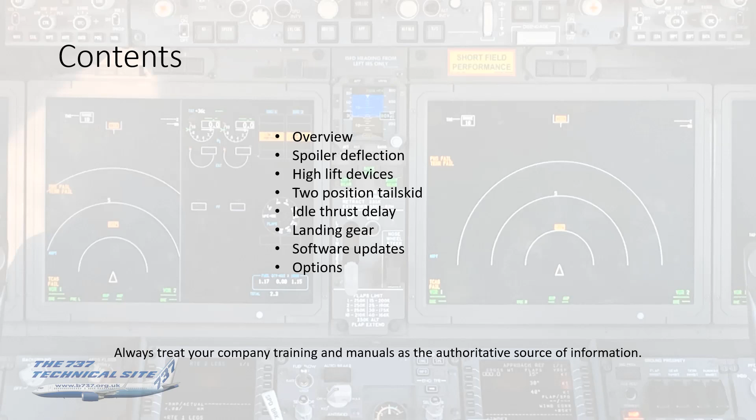Okay, starting with the overview. The SFP improvement package, as Boeing refer to it, was developed in 2005/6 to allow GOL Airlines of Brazil to operate their 737-800s into the quite short Santos Dumont Airport. The runway there is 1,465 meters or 4,800 feet, which is quite tight in an 800, and they were finding that they were payload limited.

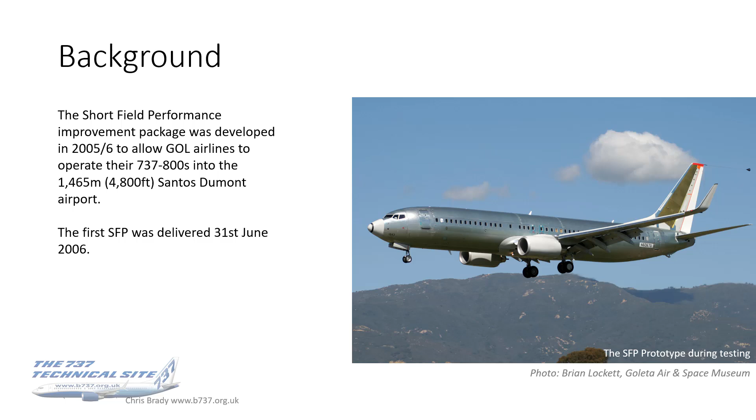So they approached Boeing, and Boeing got to work. The first SFP was delivered to GOL at the end of June 2006, and the photograph there, taken by a friend of mine, Brian Lockett, managed to catch this one, the prototype in development. You can see the two-position tailskid there is deployed for landing. It's also got a static cone up at the top of the fin there for static air pressure measurements, which are outside of the influence of the aircraft, and also similar measuring on that second window back from door one left. So various extra sensors and things that are used on the aircraft during prototype testing.

So what does the SFP give us? It either gives a weight increase for takeoff and landing from short runways, or allows an aircraft of the same weight to use a shorter runway. It amounts to the same thing - it's which do you want to optimize.

Some approximate figures here from Boeing's own literature. The takeoff field length limited takeoff weight is increased by 1,500 pounds. Climb gradient limited takeoff weight by an impressive 4,000 pounds. The takeoff roll is also reduced by 70 meters. And for landing, the VREF is reduced by 7 to 8 knots, depending, at flap 30, and around about 4 knots at flap 40. So there's quite a big advantage at the flap 30 stage there.

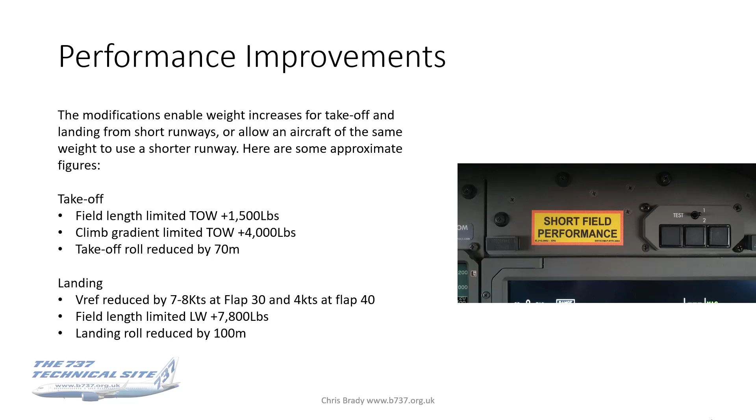Which is unfortunate, because obviously for short fields you would tend to use flap 40, but there we go. The field length limited landing weight increased by a very impressive 7,800 pounds, and the landing roll reduced by 100 meters. So there's a whole lot of performance improvements in there.

To sharp pencil this, what I've done here is shown you an extract from the flight planning performance manual. The page I'm displaying here is for the SFP1, so it doesn't have the two-position tailskid, but it's got all of the other features. I've compared that to the same 737-800 winglets without SFP, which I haven't shown on this page because it would be too busy, but you can see from the area I've circled and the enlargement of that, you're getting around about a 2-ton weight benefit for these circumstances here.

Just to outline what these circumstances were: it was the 7B26 engine, standard category C/N brakes, and this is the takeoff field limit dry runway, flap 25, packs on, anti-ice off. They're both using a field length of 2,750 meters available, 1% upslope, 20 knots headwind component, OAT of 32, and a pressure altitude of 4,000 feet.

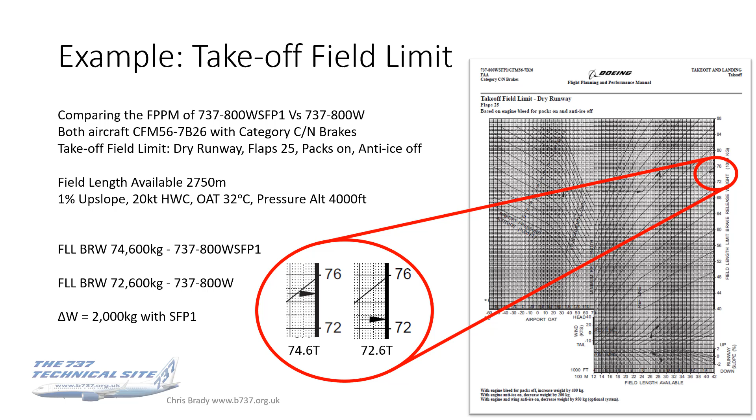And again, if you crunch the numbers, and you can see the reference line going up and across, and sliding here, there, and everywhere, you pop out with 74.6 with the SFP as opposed to 72.6 with the basic 800. So 2 tons is really quite significant - that's what, 20 passengers in round numbers. So it does make a difference to the flight being arguably profitable or not.

If it's not SFP, you can see the ground spoilers are unchanged at 60-degree deflection. But when the flight spoilers deploy on the ground, they've been used as ground spoilers as well, you get an increased deflection on the inboard pair of 65 degrees from 38, and the outboard pair of 56 degrees from 33. And that does two things: obviously, you've got an increase in form drag, which slows the aircraft down faster.

But secondly, and probably more significantly, it actually helps dump that lift and increases the loading on the main landing gear, which improves the braking effectiveness.

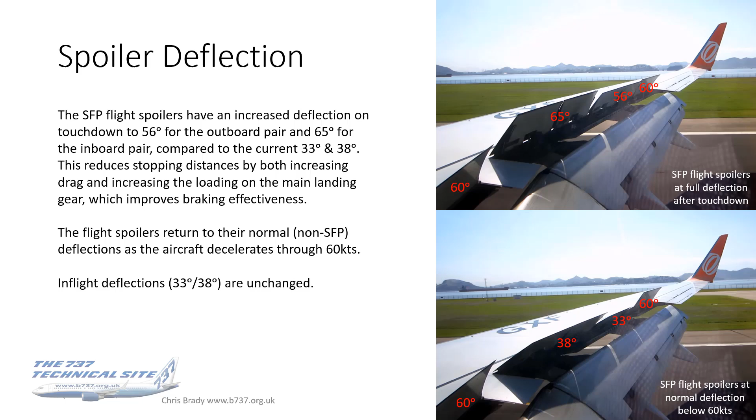Did I say a moment ago that this was for landing only? Obviously, it's also applicable in the RTO case as well. So that also improves the field length limit for the RTO case for takeoff.

Okay, high lift devices. Now, those of you who flew the classics will know that the approved takeoff flap configurations were 1, 5 and 15, and those who flew the originals will know that you could also take off with 2 as well.

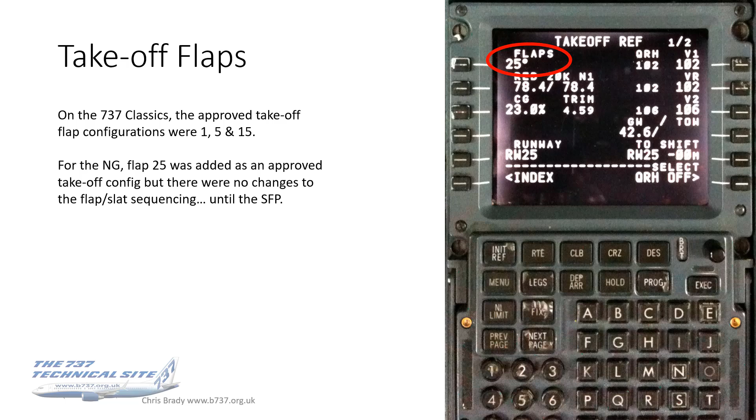Now when the NG was introduced, flap 25 was added as an approved takeoff configuration, but there were actually no changes to the flap slat sequencing until the SFP.

This I know may be counterintuitive to some. You think, well, surely you get more lift at the full extend position. You do, but you also get more drag. And it's the lift to drag ratio which is significant, which is what counts.

So what this means is that for all takeoffs with the SFPs are done with the slats in this what we call sealed position, just at extend. Sealing those slats when the flaps are in takeoff positions reduces drag and allows the wings to generate more lift at lower rotation angles, thereby reducing the takeoff speeds. So that's the crux to it.

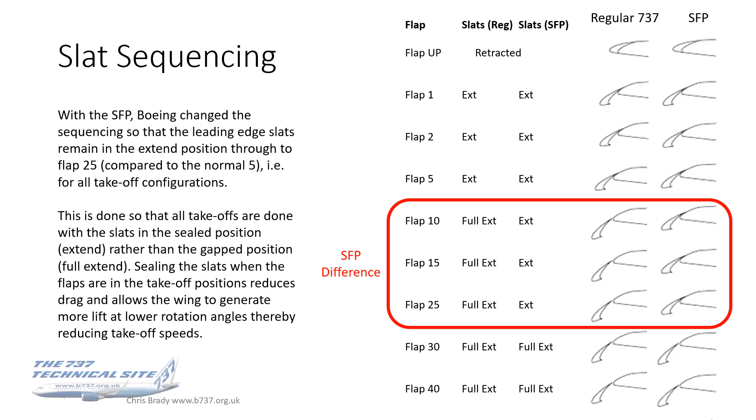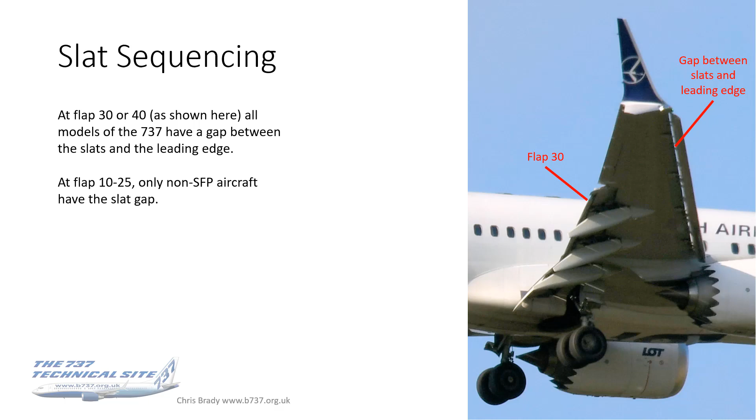Now, during the development of the SFP, Boeing actually experimented with having the Kreuger flap seal door open at flap 40. And you remember I spoke about this in the flaps and slats video presentation, that this door kind of hinges to allow movement of the translating sleeve for when thrust reverse is deployed. So Boeing thought, well, can we make that open other than when reverse is deployed, in flight, will that give any benefit?

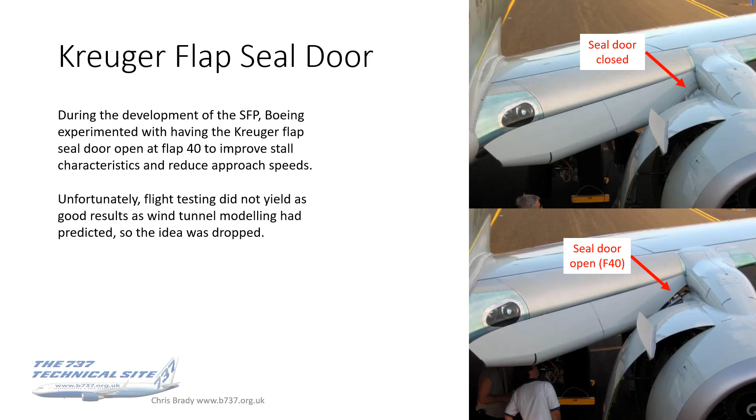And they tried it in the wind tunnel, and the wind tunnel said yes. So they thought, right, great, we'll build this in, try it in flight. But unfortunately, flight testing didn't give as good results as the wind tunnel modelling had led them to believe. So the idea was dropped. So that's actually not a thing on the SFP or the regulars. It was dropped, which is what flight testing is all about, to find out if these things will work or not. Wind tunnels don't have all the answers.

Another difference is in the power transfer unit. The logic for that has been adjusted for the SFP slat sequencing. As a reminder, the PTU operates automatically to operate the leading edge devices for either normal or autoslat operation if the B system engine driven pump pressure, the high output hydraulic pump, is lost, and you're airborne with flaps 1 to 10 on a regular aircraft. Well, obviously that's not going to cut the mustard for the SFP, where climb performance and field performance is an issue.

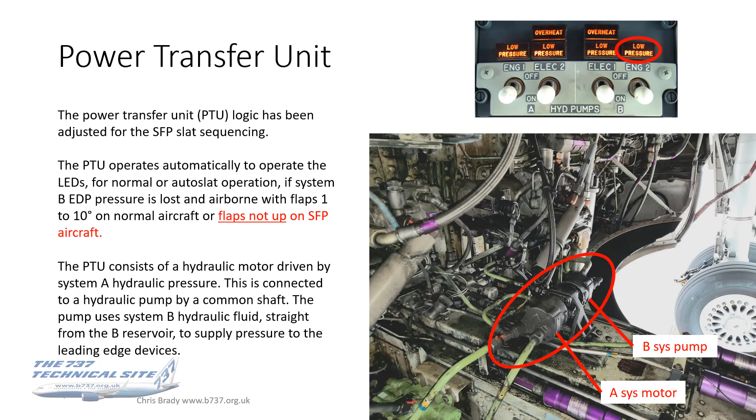So this will kick in at any time with the flaps not up on SFP aircraft. That's again just a tweak to the logic, and there are several of these with the SFP because of this change to the slat sequencing. This is one. The autoslats is another. So the autoslats, just to remind you, these will automatically move from extend to full extend if a stall is approached. So if you're in a slat configuration where the slats are only at extend, it will pop these out to full extend for you as you approach the stall.

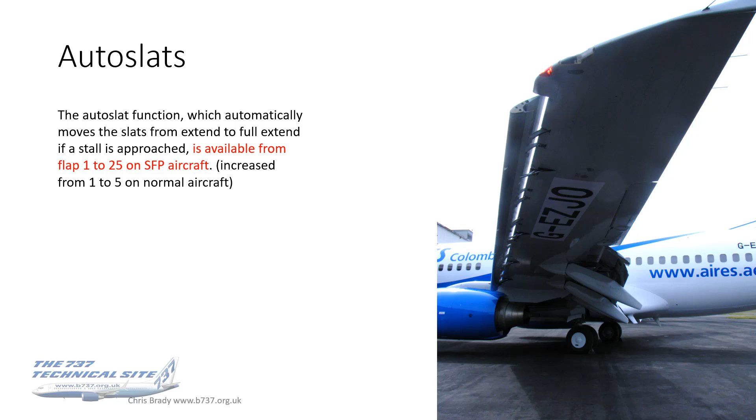On a regular aircraft, it's obviously only when the flaps are 1 to 5, because that's when they're only at extend. On the SFPs, that range is increased from flaps 1 to 25, because again that's when the flaps are only at extend. So at any time the flaps are extend, it will pop them out to full extend for you if a stall is approached.

The leading edge flap transit light logic again has been adjusted for the SFP. That's the list of criteria, and you can find it in the FCOMs. I'm not going to read it all out to you here and insult your intelligence. But the highlight is that bit there down at the bottom in red.

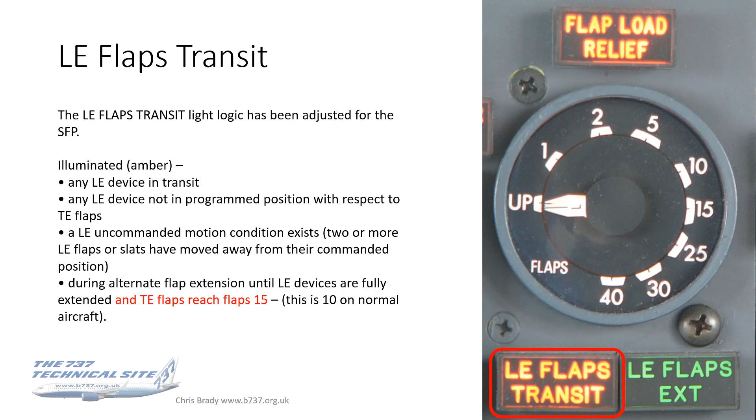So during alternate flap extension, this will go amber until the leading edge devices are fully extended and the trailing edge flaps reach flap 15, as opposed to 10 on a normal aircraft.

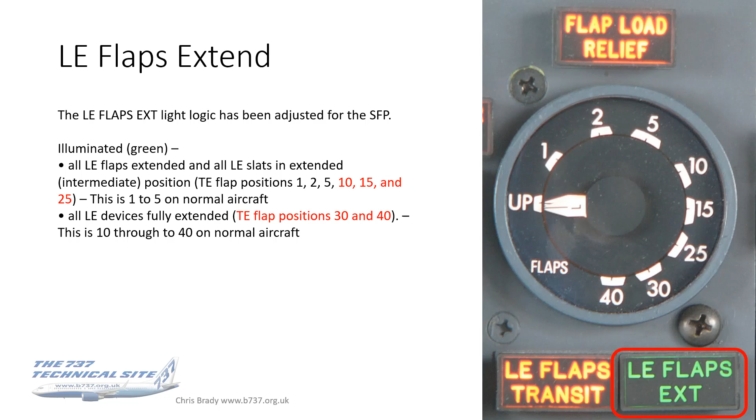The leading edge flaps extend light, the green light down at the bottom right, again a tweak of logic for the slats. This is when trailing edge flap positions are now increased out to 25, as opposed to just 1 to 5 on a normal aircraft, and again when the leading edge devices are fully extended. So again, trailing edge flap positions 30 and 40.

And the last one of the trio is the flap load relief light. This function, the flap load relief function, is armed on the SFPs from flaps 10 or greater. So this is actually quite a significant change, and a more useful rather than trivial thing to know, as were the other two lights perhaps. So you have flap load relief from flap 10 or greater. This is a big change from a regular aircraft, and it has nothing to do with the slat sequencing. This is a kind of new design feature.

A thing to point out is that although the flap load relief range is now increased all the way down to 10, the flap load relief will only retract the flap by one stage from whatever flap lever position you're at. So if you really go bust in your VFEs and you're expecting it to flap load relief all the way back to, say, 15 from 40, it won't do that. It will only go one stage. So it'll retract the flaps from 40 to 30, or from 30 to 25, or from 25 to 15, or from 15 to 10. But it won't do multiple stages for you.

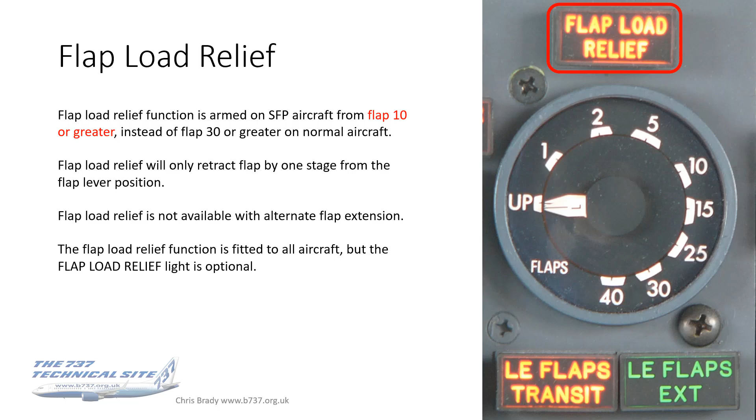Just a reminder, flap load relief is not available with alternate flap extensions. So if you use the electric system to extend it, that's it, it stays where it is. And the final thing to mention is that the flap load relief light is optional. The function is fitted to all aircraft, and the extended function is fitted to all SFPs, but the light is optional. So don't think because you haven't got the light, you haven't got the function. You do. It's there.

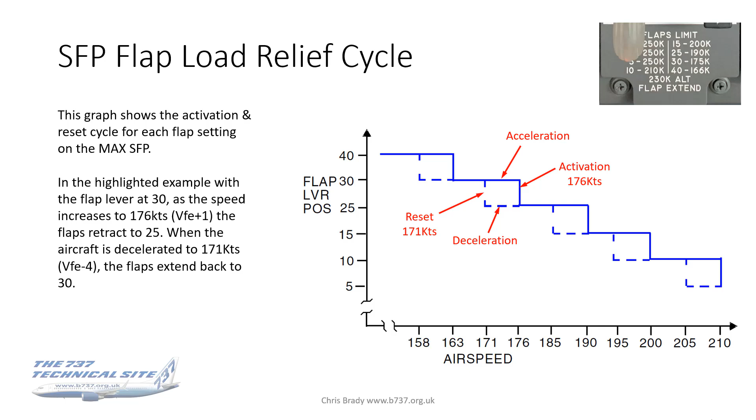Now the basic tail skid, the non-SFP tail skid, the one we saw on the 400 and most of the 800s, and the 900 actually, protects the fuselage from tail strike damage from over-rotation during takeoffs. They don't actually protect the aircraft during landing.

Now the SFP two-position tail skid aims to address that. This is an optional feature, not all SFP aircraft have got this, and if you've got it, the tail skid will extend an extra 12.7 centimetres or 5 inches for landing protection.

This allows greater angles of attack to be safely flown, thereby reducing the permissible VREFs, programmable in the FMC, and hence the landing distance. So if you can reduce the VREF, obviously you can get the landing distances down.

The tail skid will automatically extend for us when the gear is extended in flight. So when you drop the gear, the tail skid comes down. Important to note that the tail skid only extends for landing, not takeoff.

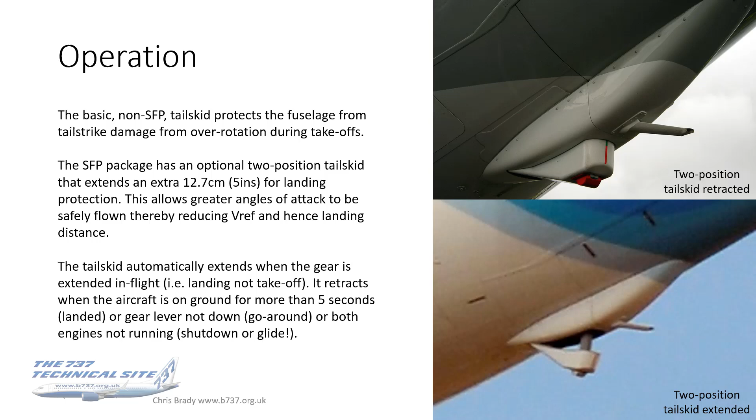So you'd think that's actually not doing us any favours, because we're going to touch with the tail skid sooner. Well, kind of yes you are, but assuming you don't hit the tail skid, because the lower approach speeds can be safely flown, they are permissible, so you get the lower VREFs. As I said earlier on, the VREF is actually reduced by 7 to 8 knots at flap 30 and 4 knots at flap 40 because of those lower approach speeds.

So it's 2 things kind of almost against each other, but the beneficial one, the overriding factor here, is that reduction in VREF.

The 2 position tail skid is optional for both the 800 and the Max 8 and the 200. It's standard though on the 900ER, the 9 and the 10. The option comes with a cost: $274,000 US in 2006 prices. That's the only figure I've seen. I don't know what it costs today.

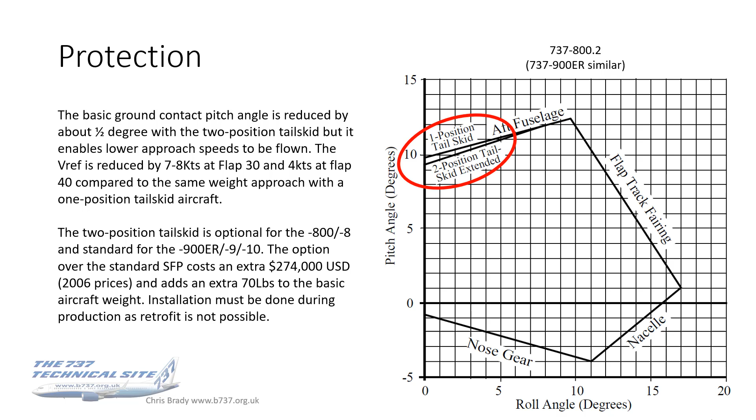So what the top chart, sorry, table, is telling us is that the demonstrated Autoland tailwind for the 737-800 with the 2 position tail skid is reduced from 30 knots to 20 knots.

I'm sure everybody watching this is going to think, we have no idea that the Autoland, the automatic landings, have been demonstrated in 30 knots - our limit is only 15 knots. Well, yes it is, and I'll come on to that - I'll say it now as I mention it. Just for the avoidance of doubt, the figure in the top table is not your Autoland tailwind limit. It's a demonstrated VMC condition wind, and it's done to determine the Autoland performance of the aircraft.

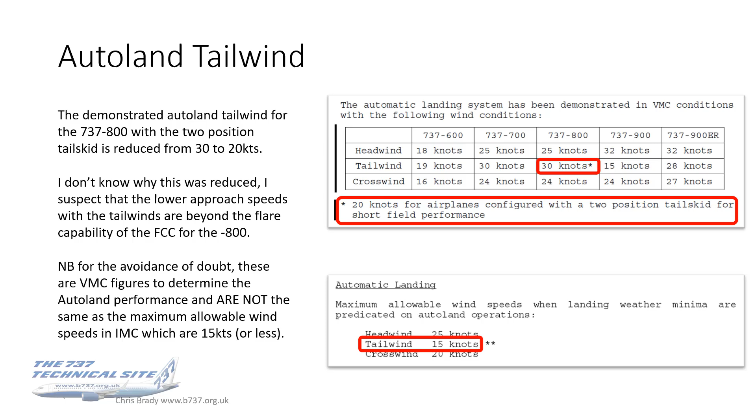But another way we can tell whether we've got the two-position tailskid is to look up the aft overhead panel, and if you're on NG, you will see an extra light up there, which is the SPSEU, the supplementary PSEU. The Max, you won't see a difference because it's all wrapped up with the new Max version of the PSEU, and the light is just a single light, called maint, for maintenance.

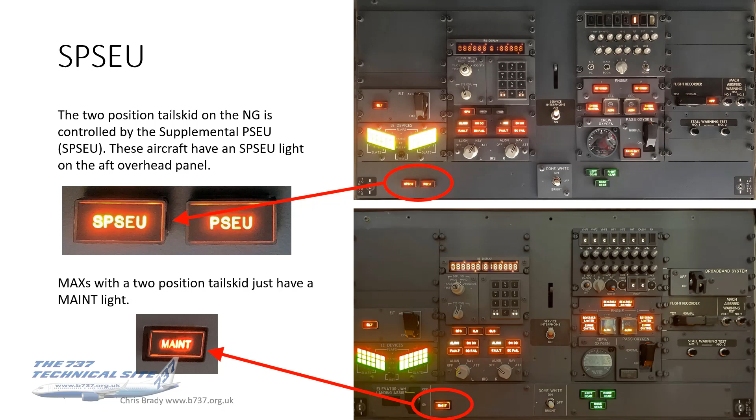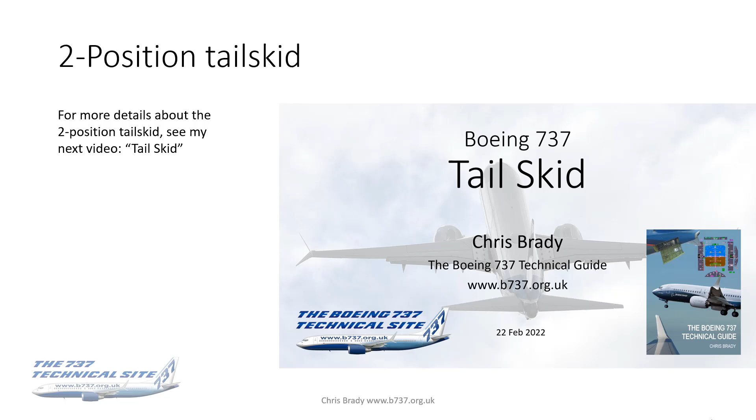Anyway, the two-position tailskid, I actually, as I do with the one-position tailskid, cover them all in great detail with the tailskid video, which will be coming out in a week or two, and it also goes into the mechanics and more of the performance differences on the various tailskid options.

Okay, next feature is an idle thrust delay. One of the more subtle ones, but the regular NGs, as you may be aware, have a 5-second delay after touchdown before approach idle, which is around about the 72-79% N2 mark, reduces to ground idle, which is about 60%.

Now this delay is intentional, and it's there to reduce the spool up time, both either for maximum reverse thrust, when or if you ever need to use that, or for the baulked landing case when you might need to spool up and go around. So that's why the 5-second delay is there.

Now with the SFP, so the benefits are you've got that spool up time available to you for full reverse or the baulked landing.

The drawback is that you've got what's known as a residual forward thrust. So if you think about it again, cast your minds back to the power plant video I did. When you select reverse thrust, the thrust that is reversed, if you like, the air that's deflected forward, is the bypass air. The core airflow actually still goes straight through the engine and through the regular exhaust flow.

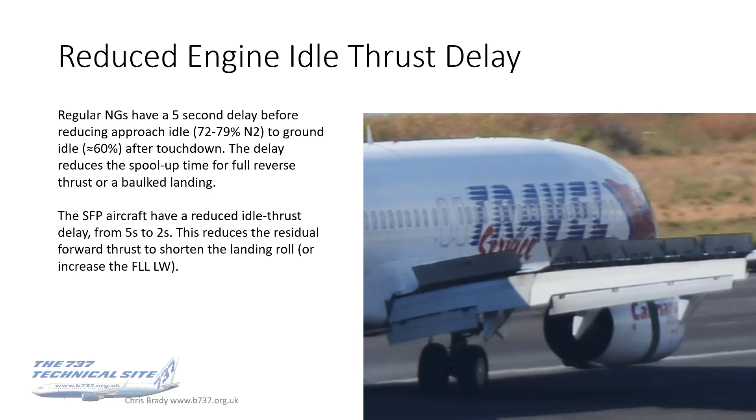So, for the SFP, Boeing elected to reduce this idle thrust delay from 5 seconds to 2 seconds. That reduces the period of the residual forward thrust from 5 to 2 seconds. That shortens the landing roll and will improve your field length limited landing weight.

Anyway, whichever way around I've got the photos, it is a fact that for the SFP, what Boeing did was they brought in the landing gear strut, the main landing gear strut, by 1 degree.

Now, that's why you can't see the difference. I mean, 1 degree is really very hard to see.

What that did is it reduced the camber, if you like, of the main landing gear, and this was probably best described by the guy that brought it in, Mike Delaney, the chief project engineer. He said we brought it in by just over 1 degree, which increases the uniformity of braking across all 4 brakes, and will help tyre wear issues that we've seen across the fleet. It's a maintenance benefit, so it's got 2 uses. Tyre wear is one use, and that's why this was actually adopted and carried forward on all non-SFP aircraft after the date of introduction as well.

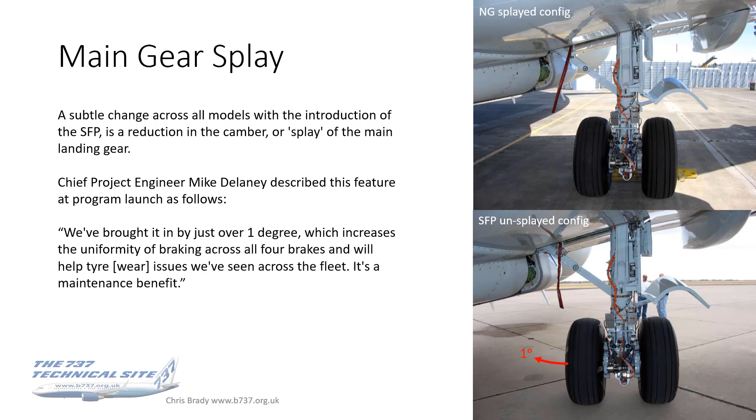But as far as the SFP goes, that uniformity of braking is the key phrase to hang on to here. Uniformity of braking means better braking effectiveness. You can imagine if the tyre's wearing uneven, the braking's uneven, and the braking won't be at its maximum efficiency. So this subtle difference again was done to increase the braking efficiency, which reduces stopping distances.

Talking of brakes, carbon brakes. These were actually introduced in 2008, so it was a couple of years after the introduction of the SFP. But I'm including it in the SFP presentation here because of the benefits of carbon brakes.

Now, Boeing's line on carbon brakes is that stopping performance of carbon brakes has been shown to be equivalent to steel brakes. However, for some aircraft configs and flight conditions, carbon brakes show better stopping performance compared to steel brakes. They're also 300 kilos lighter, and if you're not carrying 300 kilos on your landing roll, you're going to stop a little bit sooner as well. So there's a small difference there.

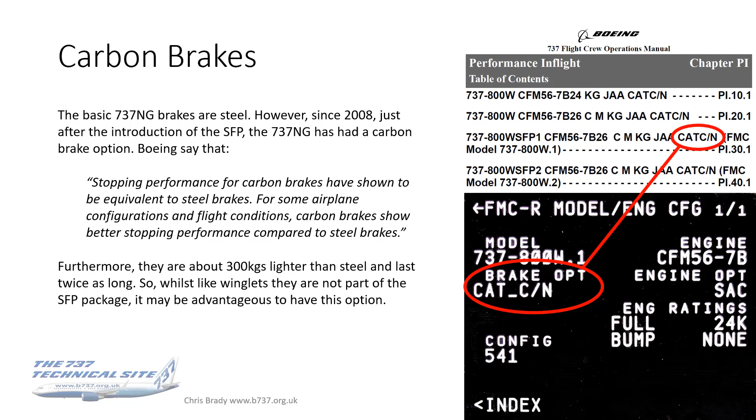They also last twice as long, so there's a decent cost benefit there. So again, like winglets, whilst they're not part of the SFP package, it may be advantageous to have this option selected. We can see it either in the FCOM there as Cat C/N brakes, or it should be in your tech log telling you, or your FCOMs, which brakes categories you've got fitted. But needless to say, carbon brakes will be useful either for weight or for stopping performance on SFP aircraft.

Software updates. There are several software updates which are required for SFP aircraft. So the first note, the one that we will see as pilots, is in the IDENT page on the FMC. I will come back and mention this in a little bit more detail in a moment when I cover options.

But also the model engine database. If you're not familiar with it, this is a database that the FMC holds for all models, the series, if you like - 5, 6, 7, 8, 900, or a 900 ER, or an 800, or an 800 with winglets, or an 800 with winglets and some SFP features, or an 800 with winglets and the two-position tailskid, which is an option in itself. So all of these different permutations of models and the different engines, because as we know we can operate the aircraft at many different thrust settings, the FMC has to know which version you're operating, and that it used to form a new aerodynamic model of the aircraft.

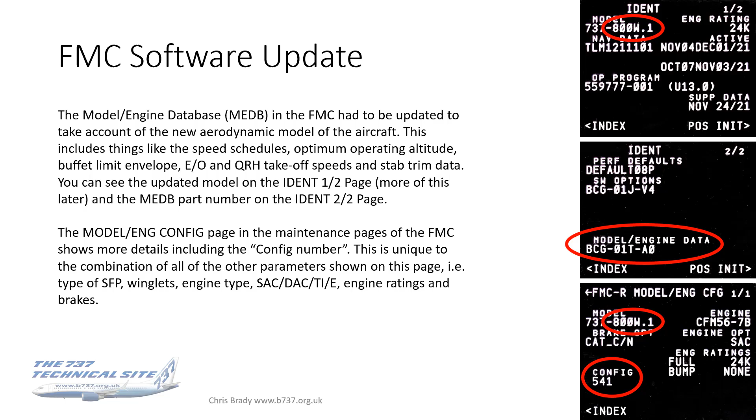So for the SFP and the various options, it needs to know that. The updated model you'll see on the ident 1 page, and also the model engine database part number is on the ident 2 page. The model engine config also appears in the maintenance page of the FMC, which gives a bit more details with a thing called a config number, and this is unique to the combination of all of the other parameters shown on the page. So the type of SFP, winglet or not, engine type, SAC DAC engines, tech insertions, evolutions, engine ratings, and brakes - all of that gets rolled into this config number.

The flight control computer also had to have a software update again, and I alluded to this when I was talking about the Autoland tailwind capability, which was reduced. So obviously things needed to be tweaked and improved on there. The Collins flight control computer software, that particular part number, known as the 140 or the P4 software, was released in August 2006.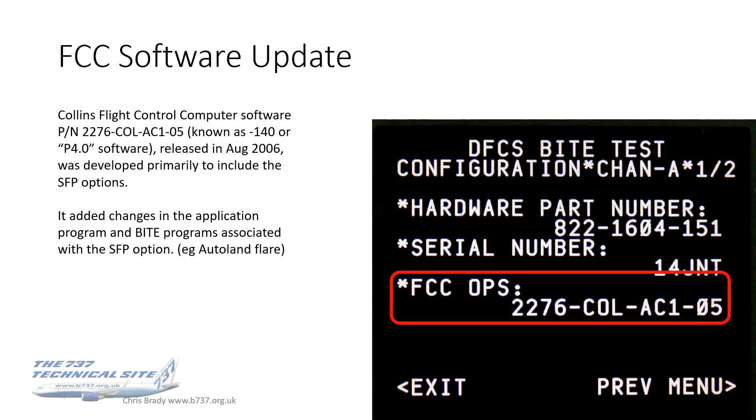Another change was to the SMIDs, the stall management yaw damper computers. The Dash 7 SMYD was developed for the SFP and became the standard SMID for all production 737s after line number 2011, which was released August 2006. So it became the new baseline SMID, whether you've got SFP or not — it's just future-proofing.

Now, why did the SMID need updating? It's because of those leading-edge slats in the extend position for those extra flap positions of 10, 15, and 25. You've obviously got different stalling speeds associated with that, and the autoslat can gap those slats for those flap positions. The autoslat needs to be told by the SMYD to kick in and operate. The Dash 7 SMID's also got a unique trip schedule for the SFP stall warning, autoslat, elevator feel shift — remember me talking about that in flight controls pitch — and stall identification functions.

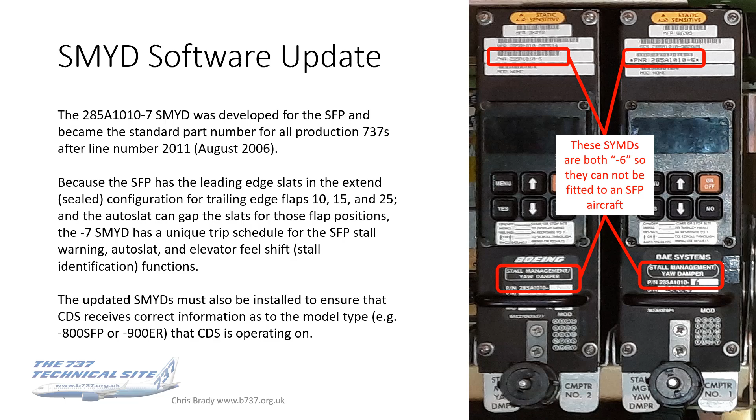If you ever pop your head in the E&E bay, you can actually see what version of SMYD you've got. I've highlighted it in the photo on the right there. You see a little thing PNR, which is part number, or P/N, and then there's a long number which you don't need to know, but at the end of it is a dash, and these photos are -6s. The only thing you need to know really is that the two SMIDs need to be the same — you can't mix and match — and that for an SFP it's got to be 7 or later. These are actually 6s in this photo, because it wasn't an SFP that I took these photos from.

The CDS, which I mentioned with the SMIDs just before, the common display system, this has had many updates. So when you fly older aircraft and they don't have the same functionality as new ones on the displays, these are the updates that Boeing released. So Block Point 6 issued September 2006 — I think that should be August 2006 actually.

It contains the operational program and the display unit database, and this has got updated coefficients for the SFP aircraft, and those are revised flap schedule speeds, the VREF plus 15 or 20 depending on your option, knot white bug speed, angle of attack approach reference for the angle of attack option, and the stall speed angles of attack. So all those things which are displayed for us on the PFD all need to be told that they're applicable for the SFP aircraft.

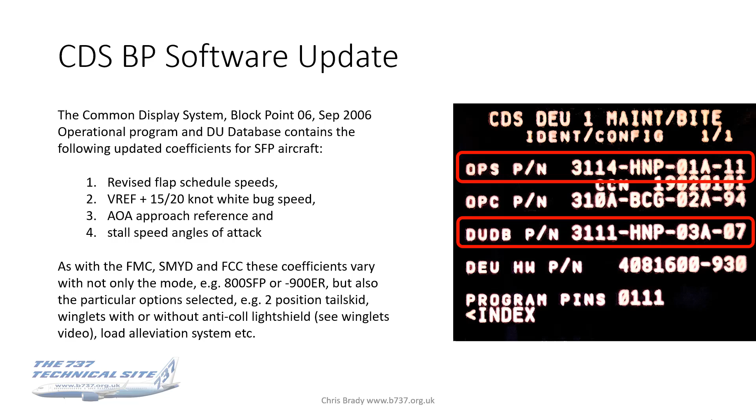Again, as with the FMC, the SMID, and the FCC, these coefficients vary not only with the model, i.e. an 800 or 900 ER, but also with the particular options selected — so two-position tail skid with winglets, with or without anti-collision light shield (going back to the winglets video), or load alleviation system, or whatever it might be. These all affect the flying characteristics of the aircraft, and hence what must be shown to us on either the speed tape or the alpha gauge.

Okay, the last thing is to look at the various options. We've talked about what those options are in detail before, but what I mean here is options as fitted for the types of aircraft — so what options are available for what particular models. Looking at the short bodies first, the 6, 7 and the 600, 700 and the Max 7 — first I should say that none of these options are available for the classics, this is just for NGs and Max. So regarding the short bodies, Boeing did offer the ground spoiler and slat features of the SFP package for the short bodies.

Obviously none of those models have got a tail skid, so the two-position tail skid was never an option - that would be a complete waste of money. The Max 7 actually is unique in the Max family, as it's the only version of the Max which has not been built with the SFP slat sequencing. All of the others, the 8, the 9, the 10, the 8200, they've all got the revised slat sequencing - it just came as standard.

Now, I am not aware of any short body SFP aircraft in existence, and please, if you know of one, let me know about it. Ideally, send me a photo of the ident page, because I've flown many of them, and I certainly know people who've flown many of them, but I haven't yet come across anybody who's said that there is either a 600, a 700, or a 7 with an SFP option. So please let me know if you know of one.

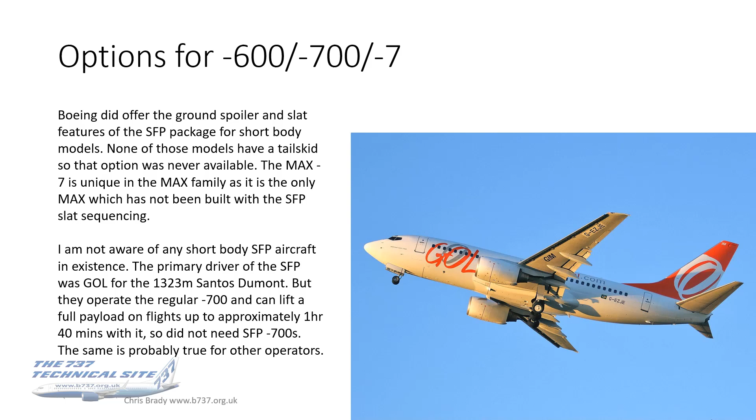So they don't need the SFP option on their 700s, and the same is probably true for other operators. Unless you've got this curious combination of wanting to fly a short-bodied aircraft at full payload on a relatively long distance flight, you ain't going to need the SFP option. And frankly, I think if GOL didn't need it and they operate the 700, then nobody would need it. But again, as I say, if you know of one, please let me know. Show me a photo of the IDENT page - I'd be fascinated to see it.

For the 800s and the MAX 8s, basically all options are available. With the 800, you've got 800 without winglets, 800 with winglets, 800 with the SFP options minus two-position tailskid, and 800 with winglets and SFP options and the two-position tailskid. So there's 4 different options for the 800 alone. And they are shown to us as either a .1 or a .2 suffix on the model on the IDENT page.

It is possible to have an 800 with an SFP option, but without winglets, but again, it's another option I haven't seen. So if you know of or are flying an aircraft with an 800.1 or an 800.2 without winglets, then again, please let me have a copy of the IDENT page. I would find it fascinating.

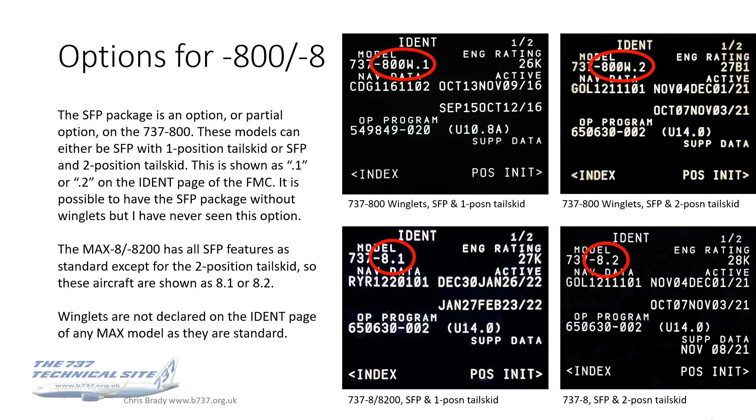Now, the MAX 8 and 8200, they have all of the SFP features as standard, except for the two-position tailskid. They also have winglets as standard, so they've dropped the W suffix from the IDENT page. So what you will see in a MAX either 8 or 8200 is 8.1 or 8.2. The 8.1 is standard, that just basically means you've got the SFP, which comes as standard, and the one-position tailskid. The 8.2 means you've got the SFP and the two-position tailskid. So that's the decode, if you like, of the IDEM pages for the 800s and the 8s.

With the 900s, 900 ERs, 9 and 10s, well, the 900 was built before the SFP was introduced, so they don't have any SFP features. Winglets and carbon brakes obviously can be retrofitted, so for a 900 on the IDENT page, you're only ever going to see 900. The 900 actually became the 900 ER in 2006 because of the SFP. So it's one of these things in the sort of development of the 737.

If you think of the chronology, GOL put in the request for a short field version of the 800. Boeing got to work on it, came up with this suite of improvements. Then looked at the 900 and thought, well, if we put them on the 900, we could really make something of that aircraft. They did.

They also put the mid-exit doors on it, and hey presto, there's your 900ER. The 900ER ident page will only ever show up as 900ERW. That is the only version of the 900ER ident you will ever see. They don't specify .1 or .2 because they are standard. They're all .2s, if you like.

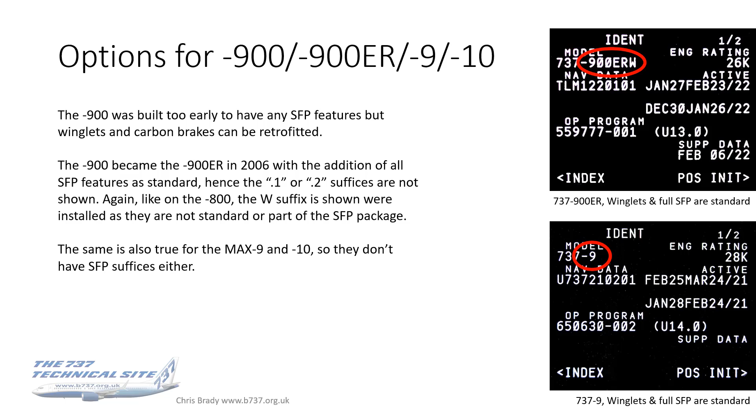But there you go. With the Max 9 and the Max 10, I'm sure it's the same, but I don't have an ident page photo to show you. They don't show any SFP suffixes or the winglet suffixes either, because they're all standard. So if you're in your Max 9, that's all you will see, even though you've got the full SFP package and winglets.

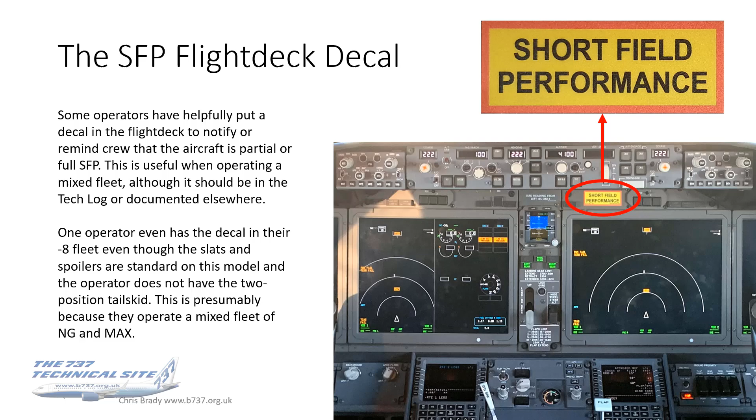So obviously, what they're meaning is it's just the other SFP features, and it's done, I guess, because they operate the 800s as well, some of which are short SFPs and some of which aren't. So there we go.

Summarising all of those options: going across the top, we've got the short bodies, then the 800s, the Max 8s, 900, 900ER, and 10s. You can see which of those features were optional, which were standard, which were not an option at all, and a little tie-up at the bottom with the FMC ident for those particular features.

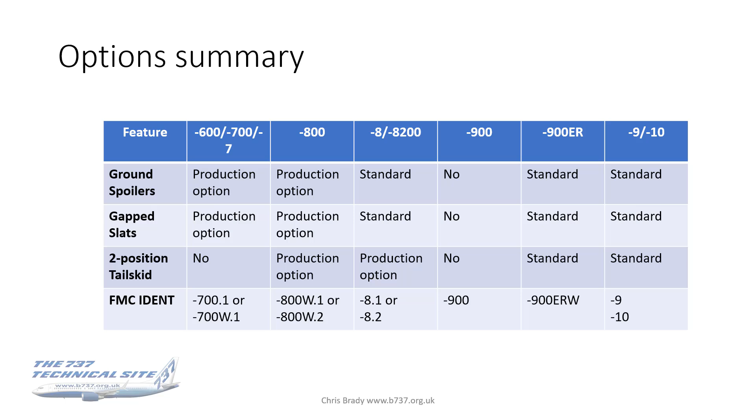One last thing to say is retrofitting. As far as I know, the various SFP options can only be installed during production, and no SFP features can be retrofitted. In the very first SFP airplane configuration bulletin - these are the documents Boeing used to announce new features or design changes to operators - the very first one stated that currently Boeing is studying the possibility of offering the sealed leading edge slats for takeoff portion of this package for retrofit, and that provisions for these options will be provided on all aircraft.

On a later update to that ACB, they changed this line to: retrofit of the short field performance optional feature is not available, and I believe that was the final position by Boeing. So no retrofitting was available as far as I know.

Again, if you know different, please let me know. Certainly I do know that the two-position tail skid was absolutely never on the cards as being a retrofit, but I thought it was possible - or certainly looking at this, it was possible - that the gapped slat was a possibility, or the increased flight spoiler deflection on the ground. But I believe, certainly from what I've read in the latest ACB, that idea was canned.

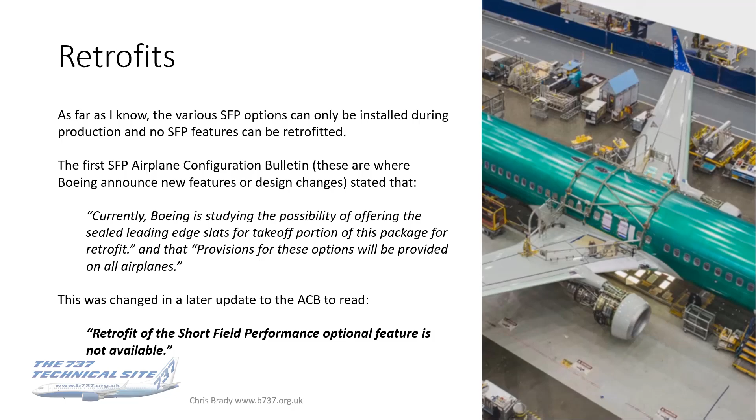So there you go, that's all about the SFP.